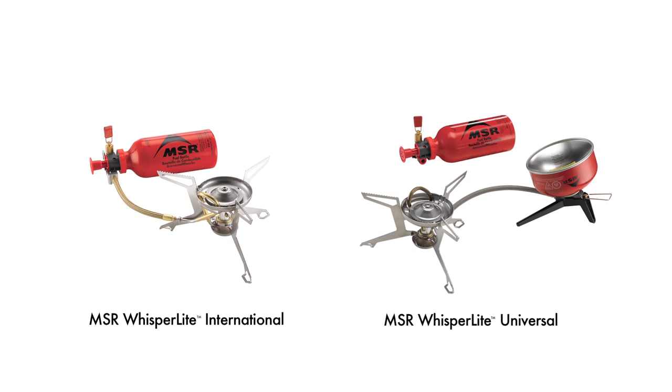Maintaining your MSR stove ensures safe and efficient performance. This video pertains to MSR WhisperLite International and WhisperLite Universal stoves with flat stainless steel pot supports.

If you have a wire leg WhisperLite or WhisperLite International, please refer to the maintenance video for WhisperLite and previous generation WhisperLite International stoves. Two types of maintenance kits are available for each model of MSR liquid fuel stove.

The annual maintenance kit includes tools and parts needed to perform basic maintenance on your stove and pump. The Expedition Service Kit includes everything you need for comprehensive maintenance and repair. To perform all the maintenance described in this video, you will need the WhisperLite Expedition Service Kit.

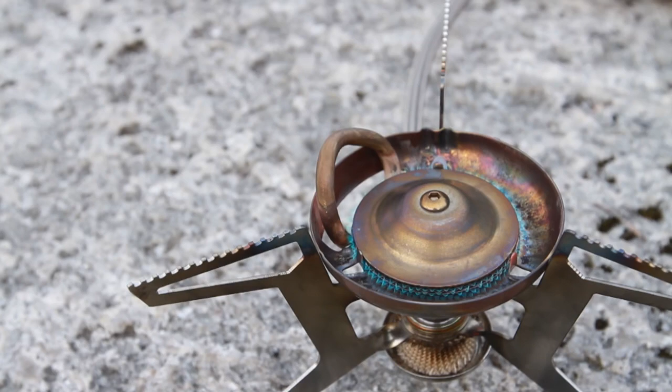After several months of frequent use, or after using fuel that is dirty or contains high levels of additives, deposits may have built up in the fuel line and be clogging the jet. If your stove's performance is compromised, first try and clear the jet by using the stove's built-in shaker needle. If the stove still performs poorly, it may be necessary to conduct a comprehensive cleaning of the fuel line and jet. If this does not improve performance, then perform maintenance on the pump.

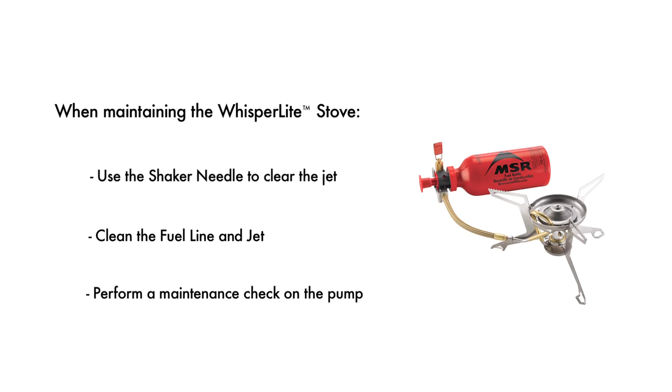For pump maintenance, please watch the pump maintenance video. This covers the proper maintenance for all MSR pumps.

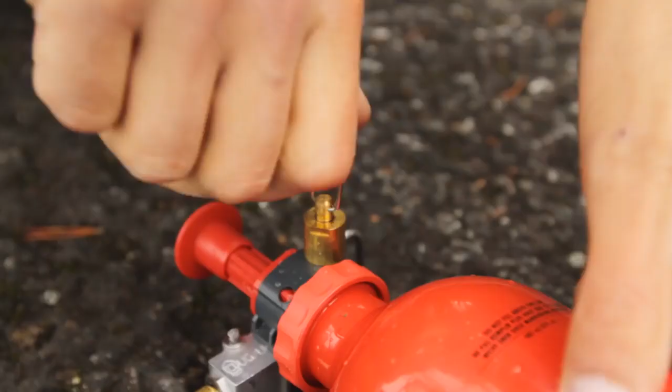Close the control valve on the pump to turn off the stove and wait 5 minutes for it to cool down. Disconnect the stove's fuel line from the pump and shake the stove up and down. You will hear the shaker pin clearing the jet.

Reattach the fuel line to the pump. Prime and run the stove as usual. In most cases, the stove will once again perform well.

Over time, these deposits can build up to the point where they cannot be cleared by the shaker needle. In these cases, the stove may require more extensive cleaning of the jet and fuel line. Turn off the stove again and let it cool for 5 minutes.

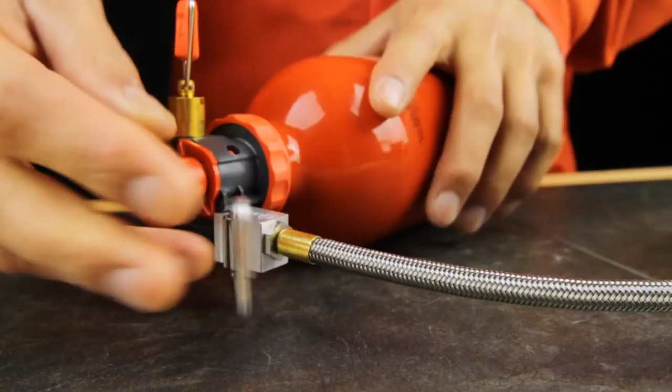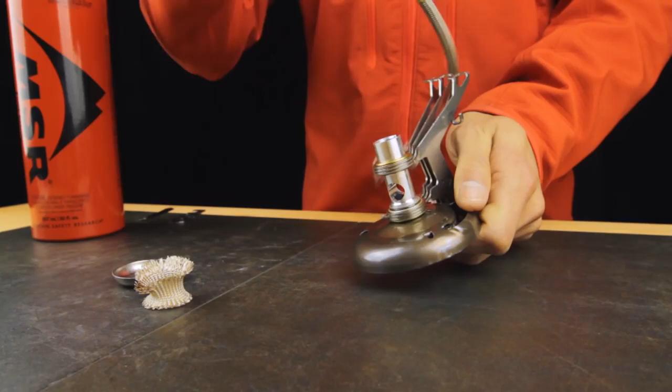Disconnect the fuel line from the pump. Fold the pot supports to their packed position. Unscrew the priming cup and remove the wick. Slide out the fuel line generator loop, invert it, and place the elbow of the fuel line back into the mixer tube. Using the jet and cable tool, unscrew the stove's jet and remove the shaker needle.

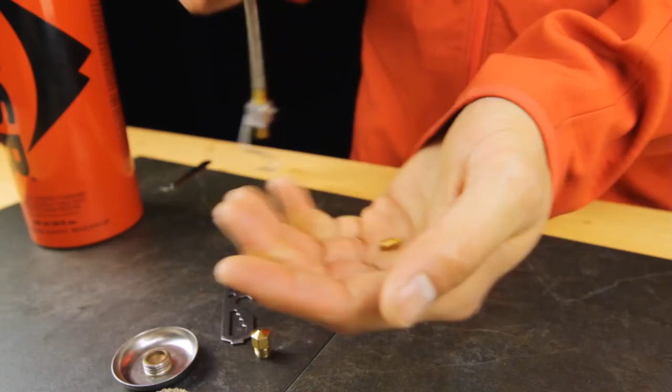Make sure you do not bend the fuel line generator loop. Manually clear the jet using the jet cleaning wire or the needle on the shaker. The hole in your stove's jet is very small, but can be seen when held up to a light.

If the jet has a blockage that you cannot clear, then replace it with a new one from the Expedition Service Kit, making sure it is the same jet type.

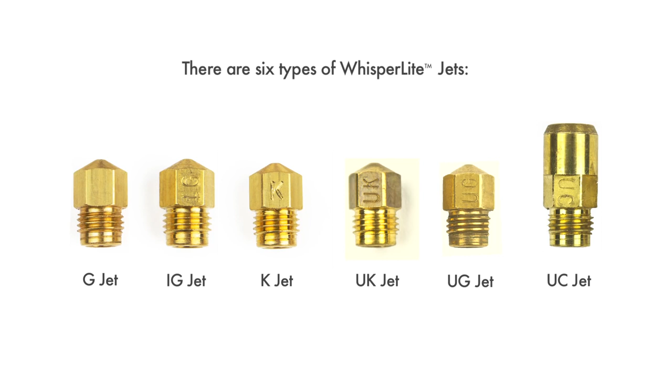There are 6 types of jet provided in the WhisperLite Expedition Service Kit. Most are marked with a letter code stamped on the head of the jet, indicating which fuels they can be used with. 3 of these jets are specific to the current models of WhisperLite International and WhisperLite Universal. 2 of the jets are specific to the older model WhisperLite International. The unmarked G jet is for both the current and previous models of standard WhisperLite.

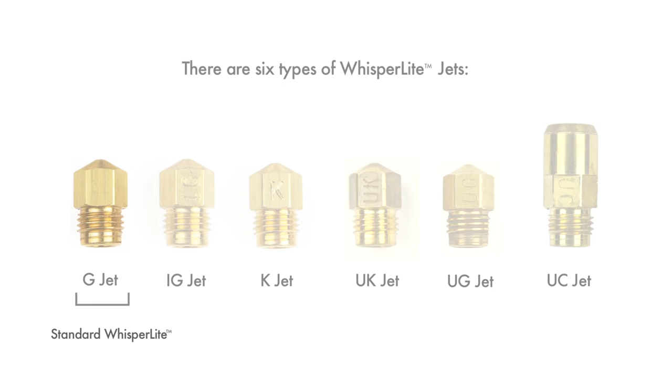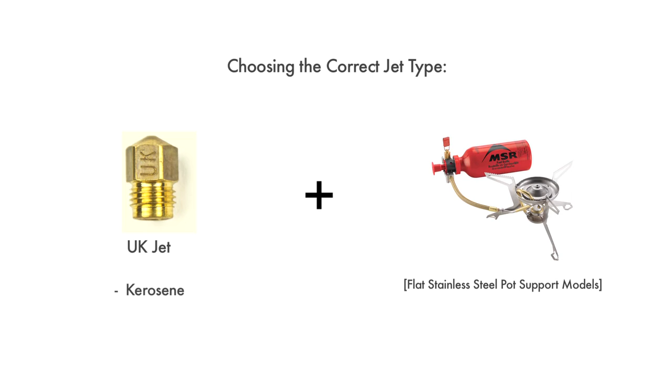The UG jet is used for white gas and unleaded auto fuel on the flat stainless steel pot support models. The UK jet is used for kerosene. The UC jet is used with the WhisperLite Universal for canister fuels.

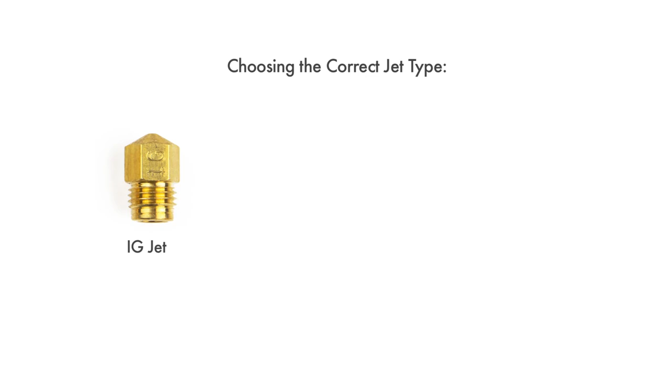The IG jet is used for white gas and unleaded auto fuel in older model WhisperLite Internationals. The K jet is used for kerosene in older model WhisperLite Internationals.

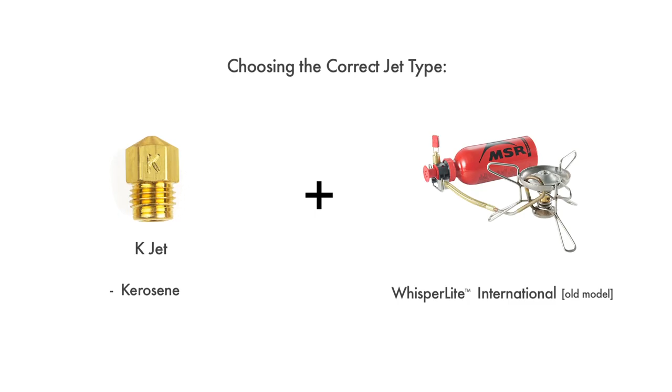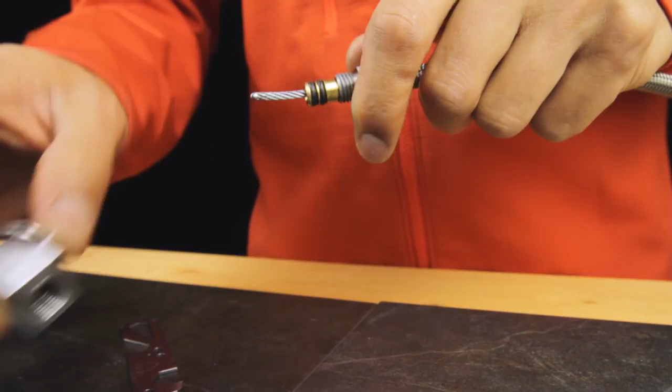For WhisperLite Universal stoves, it is necessary to first unscrew the fuel adapter from the fuel line before accessing the fuel line cable. Slide the cable tool over the tip of the fuel line cable and grab the cable by tilting the tool at an angle, then pull it out.

The cable may need to be loosened with a common lubricant, such as WD-40 or pump cup oil. Wipe the cable clean and reinsert it into the fuel line.

Using 5-inch strokes, move the cable back and forth about 20 times to remove any deposits in the line. Remove the cable completely and wipe it clean.

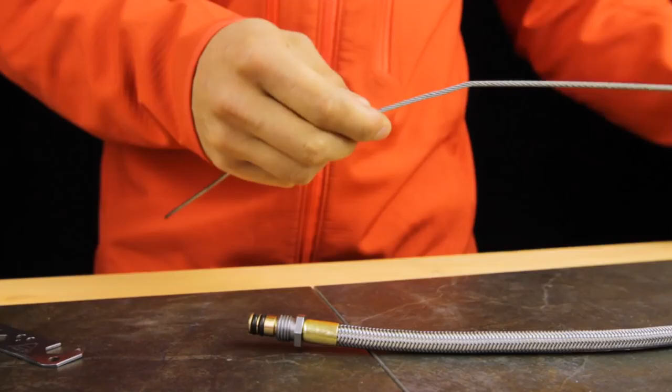The WhisperLite Universal requires the liquid fuel adapter to be reinstalled to complete this step. Reattach the fuel line to the pump and secure it with the latch.

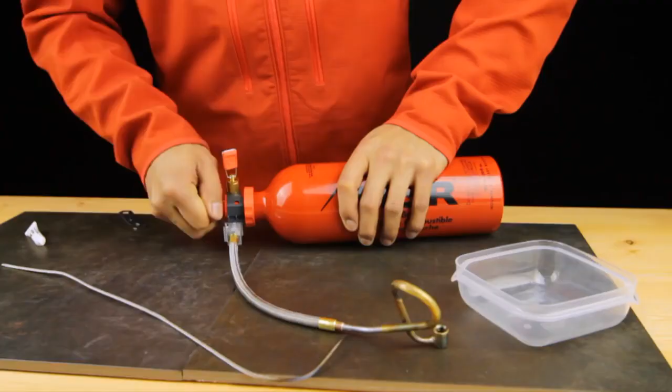Pressurize the bottle with 15 strokes of the pump. Making sure that there are no ignition sources or flames nearby, open the valve and flush 3 to 4 tablespoons of fuel through the stove and into a container.

Always operate the fuel bottle with the valve handle facing up. Safely dispose of the fuel used to flush your stove.

Turn off the valve and detach the fuel line from the pump. Disconnect the fuel adapter if working on a WhisperLite Universal.

Push the cable back into the fuel line until it is almost completely inserted. The WhisperLite Universal requires the liquid fuel adapter to be reinstalled to complete this step.

Replace the shaker needle and the jet. To do this, place the shaker needle inside the jet before screwing it in.

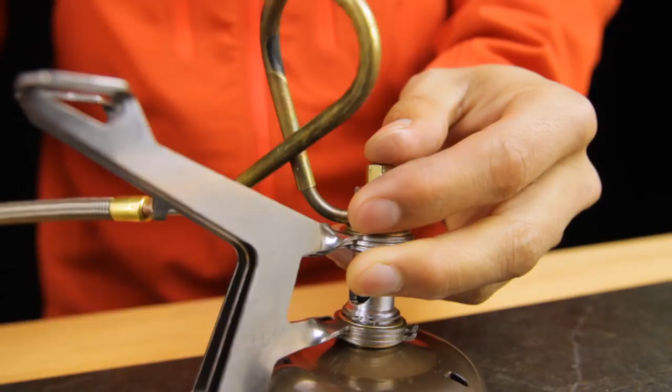Invert the jet generator loop assembly and place the elbow of the fuel line into the mixer tube. Use the cable tool to ensure that the jet is tightly fastened. Slide the fuel line generator loop back into position.

If using the WhisperLite International or WhisperLite Universal, be sure to replace the wick before securely fastening the priming cup.

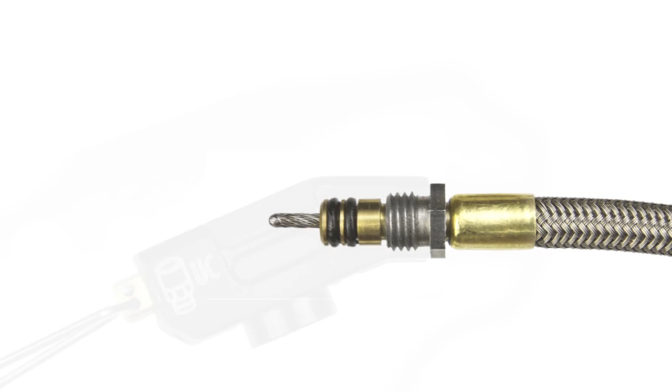WhisperLite Universal stoves have an interchangeable fuel adapter at the end of the fuel line. It is necessary to inspect the fuel adapter swivel O-rings at the end of the fuel line when servicing your stove. Inspect the O-rings. If they are cracked or damaged, remove them with a safety pin and replace them immediately with new ones from the service kit.

Lubricate the O-rings with pump cup oil and reinstall the fuel line into the liquid fuel adapter, making sure it is properly tightened.

Prime and run the stove. If the stove is still not running at full capacity, then repeat the cleaning process.

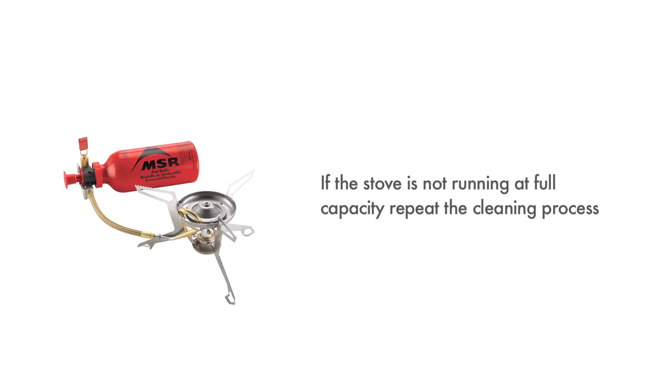Regular stove maintenance ensures that your stove performs well for years to come. It is recommended that you perform this maintenance before taking the WhisperLite on expeditions or long trips.